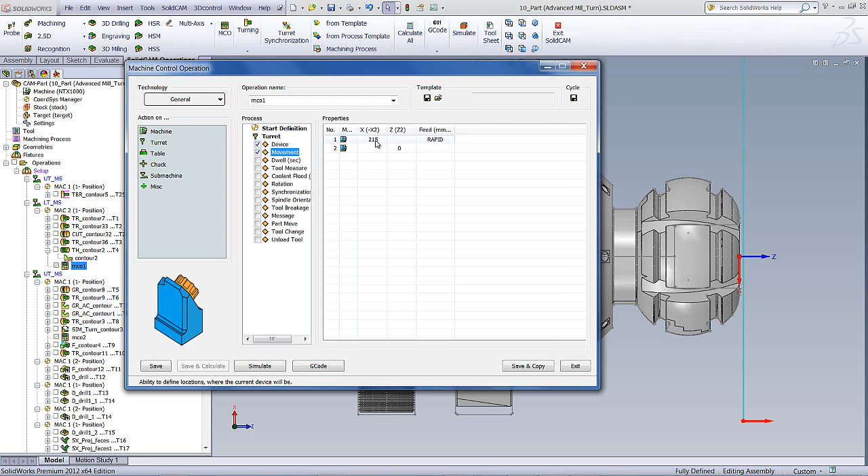If we were to open up the MCO operation, you can see that we have our turret over here, and we want to actually move it from one position to the next. Now, at the end over here, we've inserted an MCO operation. If I were to open up the MCO operation and go into turret, you can see that we'll be actually moving the device. We have the device and we have a movement. If you take a look at the movement, you'll see that we'll be taking our bottom turret and moving it back 215 millimeters. Let's take a look for a moment at the actual machine simulation.

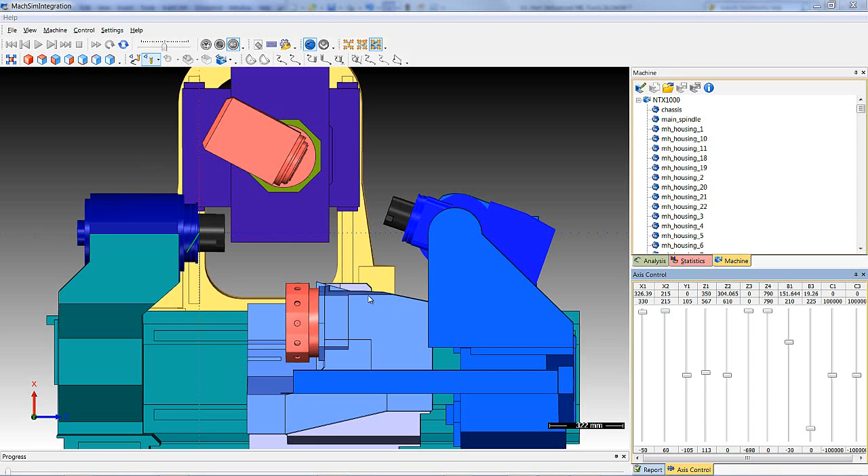And as you can see over here, we have this, which started out over here in this position. And since we want to work from a different position now, we want to get this out of the way. So to do that, we've actually just told it to move all the way to 215, getting it out of the way, allowing the next operation to work without any interference. Now, let's take a look at the first operation that we've done here, which will be the actual balanced rough of this part itself over here.

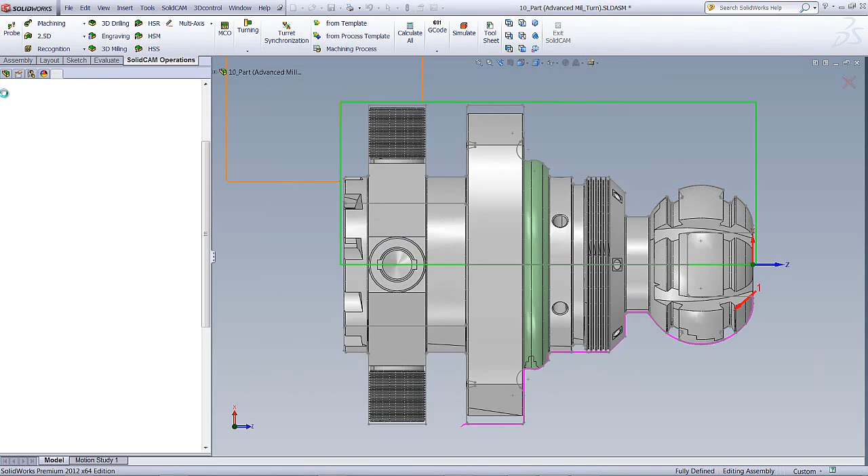If we open up the option over here, we can see that since we're working in balanced rough, we have two submachines that we have to work with. The master submachine using the upper turret, in this case with the main spindle, and the slave submachine using the lower turret with the main spindle. We can take a look at our geometry over here, and you can see that we'll be working on the outside of the part itself. Now also, when we go into tools, you can see that we have our tool for the main submachine, using it on the upper side over here, showing exactly where it's coming from. And if we go into our slave tool, you can see that's also coming from the bottom over here.

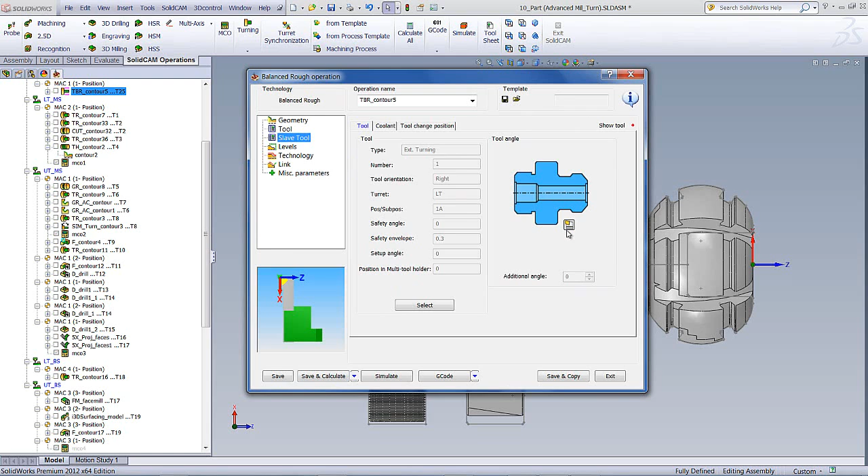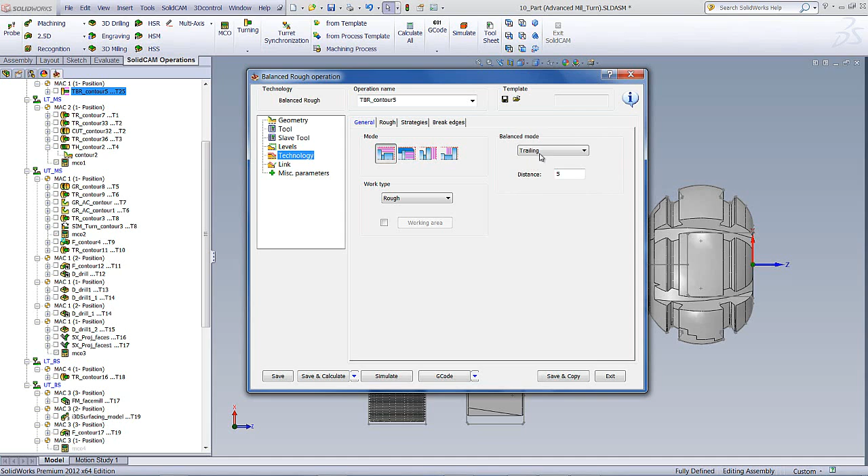Now let's go into our technology. In the technology itself, you can see what mode we're working in. We're working on long external, and we're also doing the rough. Now, before we continue on to the next area of rough, let's take a look at this area. Since we're working in balanced mode, we have two options of working in balanced mode. We can work in trailing, where one tool follows the other tool working on different levels, or they both work simultaneously, taking the exact same cut on both sides. In this particular case, we're working using the trailing option.

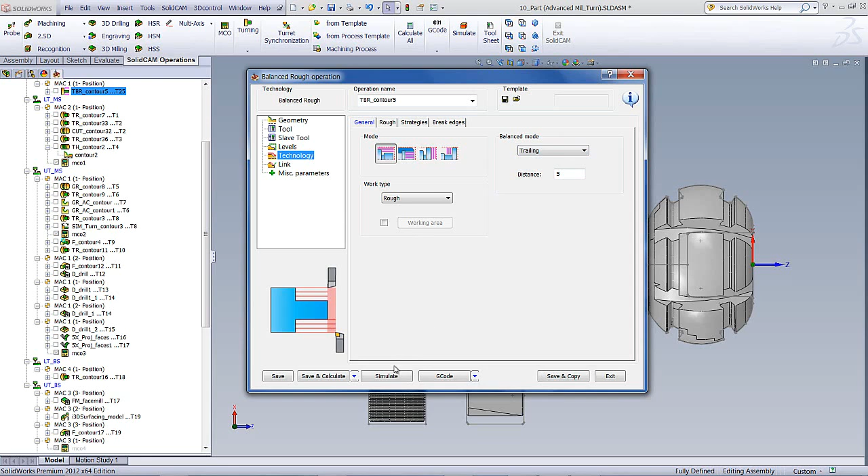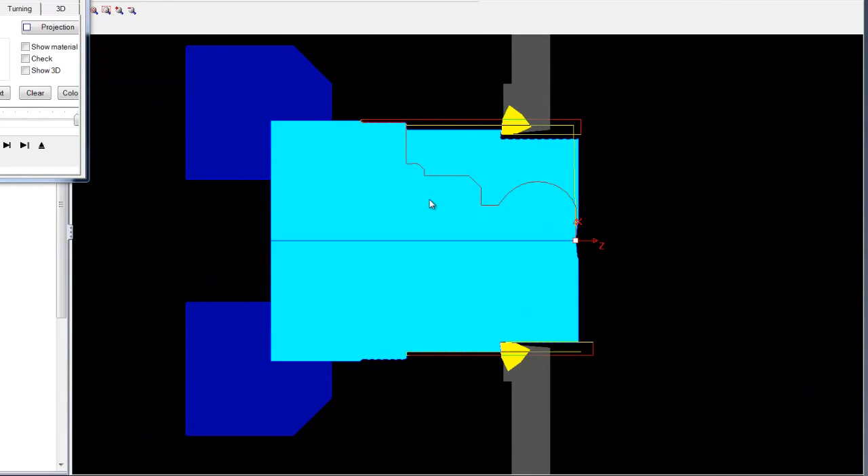Let's take a look now at the simulation. And in the simulation, we'll be using the option of turning. Now, also in turning simulation, you can see that we've made it a lot easier. First of all, you can actually just move it over here. We can also zoom in and out. A lot easier than we were able to do that in the past. So I'll leave it at this position over here. Just slow this down a bit, and you can see exactly what's happening with our balanced roughing in this particular operation.

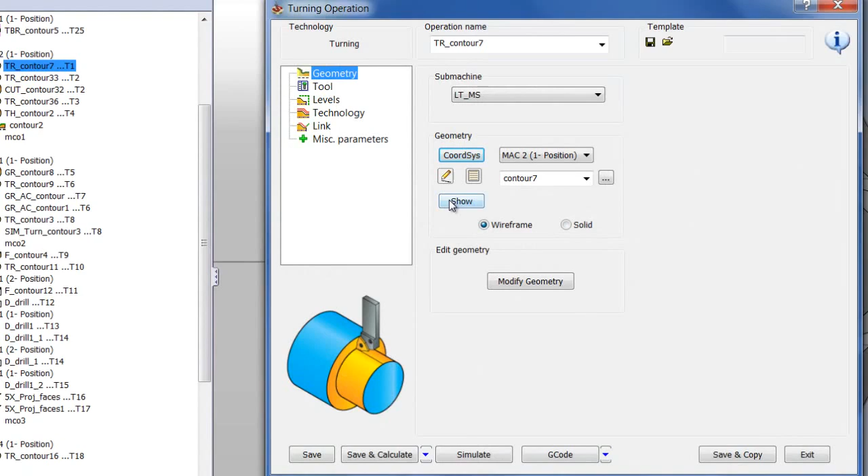Now, the next operation will be doing the face over here. If we were to actually go in and open up our operation, you can see that we've chosen our geometry as shown over here, working on the face itself. And of course, we're using the lower turret with the main spindle in this particular case. Next, we have our next operation over here, and that is actually working in this area, cleaning the rest material over here. If we were to open up the operation itself again, you can take a look at the geometry, and that geometry includes this area over here.

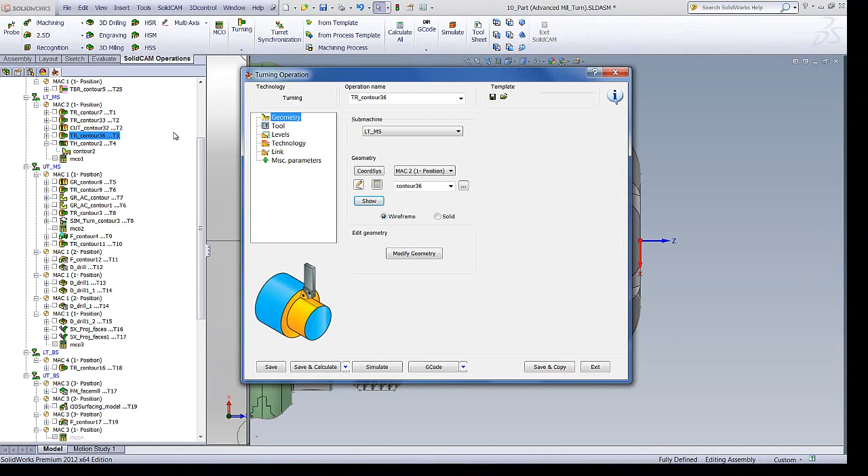In our next operation, we're actually working on this groove over here. And if we go into this operation, you can see the geometry, this area over here, using the proper grooving tool that we need for this particular operation as shown over here. In our next operation, we'll be doing a finish on the outside of the part. And if we take again a look at our geometry, you can see that we have our geometry over here going around the part. If we take a look at our tool, first of all, we're working on our lower turret with the main spindle. And again, you can see the tool that we'll be using in this particular operation over here.

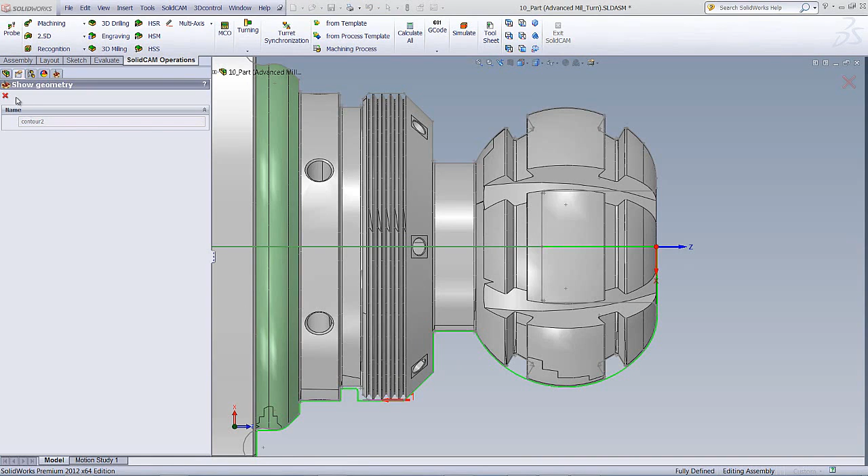Next, we have the threading. The threading is this area over here. And if we go into our operation, you can see the geometry working across from here to here using the proper tool, in this particular case, the thread mill tool for this operation.